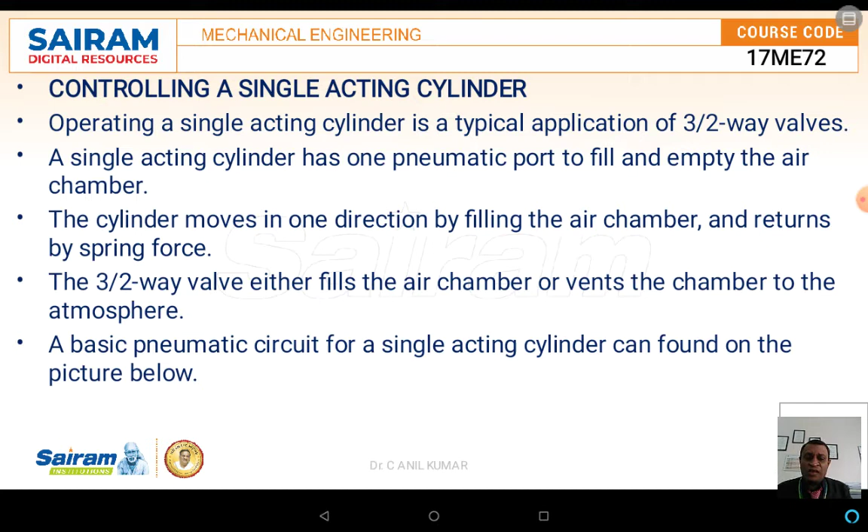mechanism. The basic pneumatic circuit of a single acting cylinder can be explained in a simpler way as this. Now here in this case, it consists of the ports. Even in these DCV valves, a 3x2 DCV valve is sufficient to control the entire mechanism with respect to the opening as well as the closing of the valve.

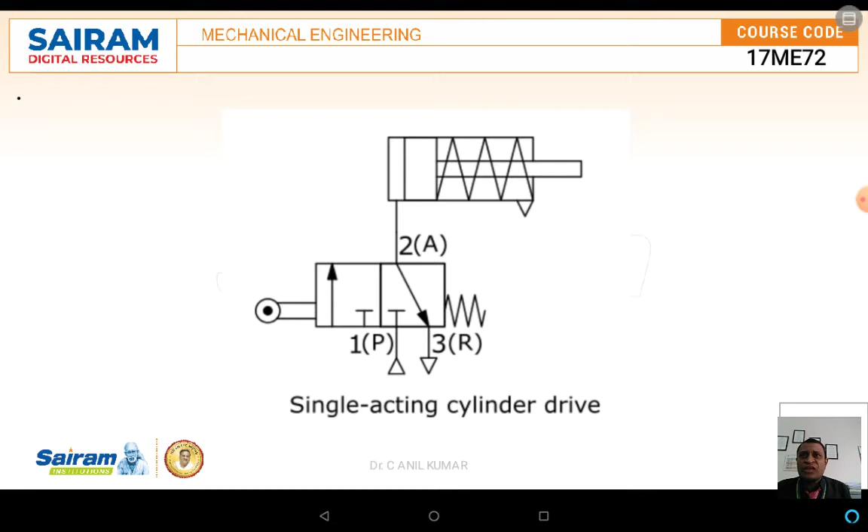The next part is with respect to the fluid power circuit using the electrical circuit. In the case of the fluid power control mechanism, along with the 3x2 valve, you can go for controller circuits. Controller circuits are also used to break and disconnect, or to continue the connection, and electrical switches can also be used to have a fruitful working of

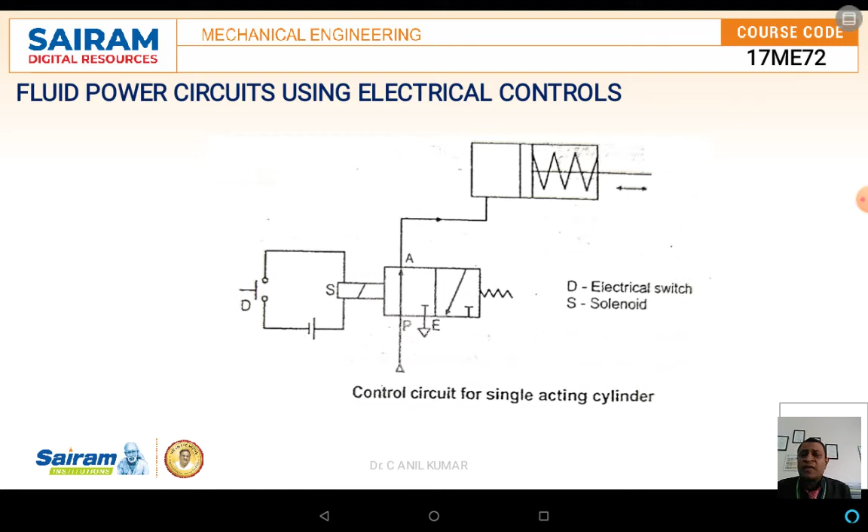a power circuit. Now the next topic we are discussing is the double acting controls with limit switches. Even in the previous classes, while discussing the cascade mechanism, we had discussed the limit switches. As here double acting cylinders are used with DCV valves, we have to use 5x2 way DCV valves, and then by using the limit switches, it is very easy

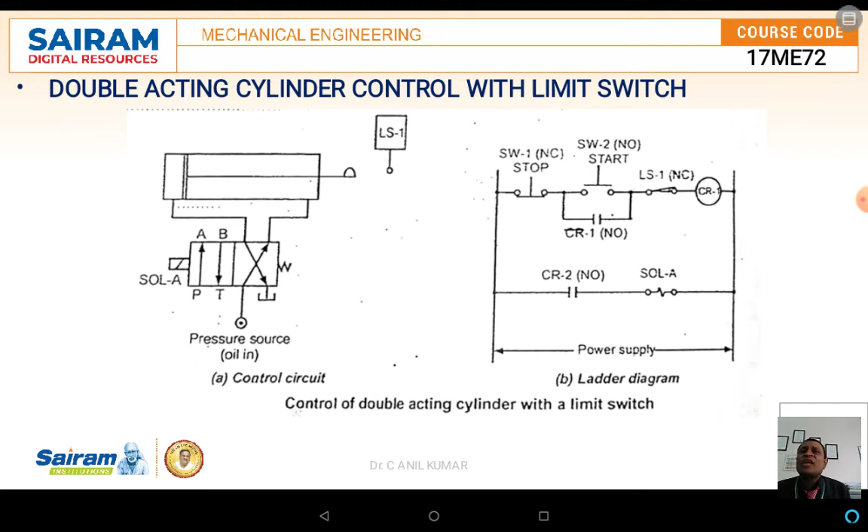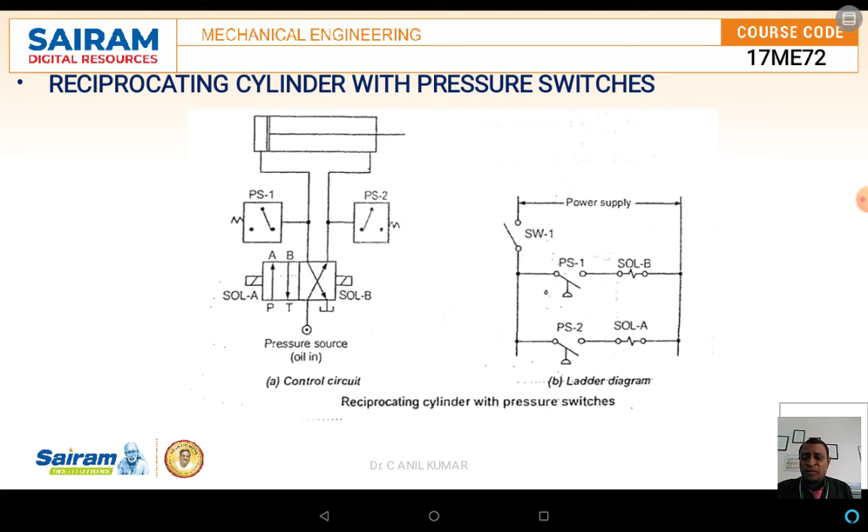to control. Now in the case of the reciprocating cylinders with pressure switches, the pressure switch is another form of control mechanism by which the entire cylinder movement can be controlled very easily. This is another switch which switches off and on with respect to the pressures. In the previous topics, we discussed using the valves. But as the technology has advanced, pressure control switches are also used to have the to and fro motion of the cylinder mechanism.

The next part is with respect to the memory function. The memory is a common basic function, and it can keep the component at a certain state permanently until there is a change of the signal. Especially this type of circuit plays a major role in the case of

the fluid power systems. In the memory function circuit, when a control valve is operated momentarily, that is, pressed for a short duration, the output signal of the 5x2 way direction control valve will be set on. It means that the signal will stay that way until the control valve is operated momentarily to generate another signal to replace it, causing it to stay permanently at off. This is called a memory function valve.

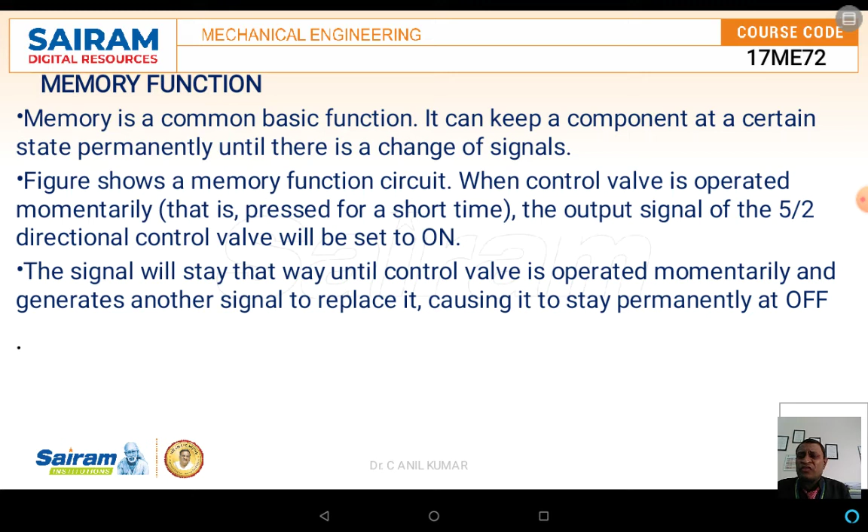A schematic diagram shows the memory function valve operating with respect to the forward stroke and the return stroke. Here the valves we are using are the 3x2 way valve and the 5x2 way valve. In the lower part, there will be two valves: one is a forward valve, the other a return valve, which are of the 3x2 way. The other one is a memory valve, which is a 5x2 way valve.

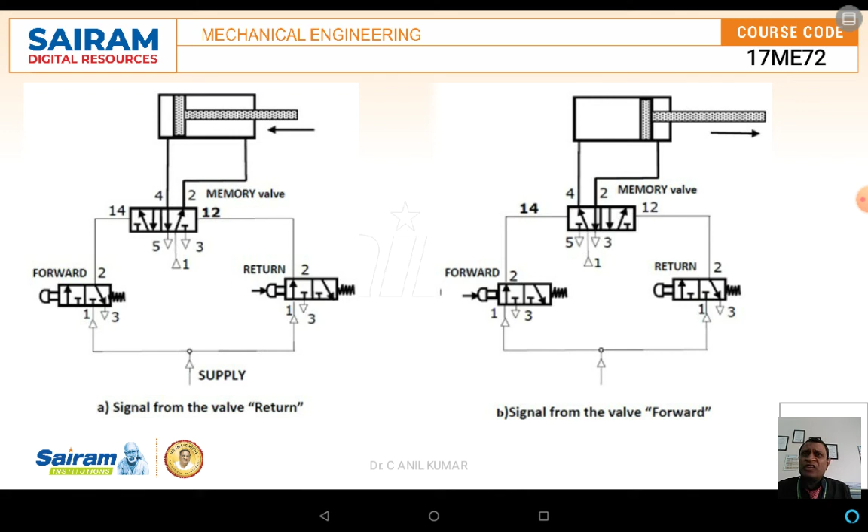By using these two, if you press the return push button, automatically the return stroke will be operated. Once the forward button is pressed, automatically the forward stroke will be operated. By pressing the 3/2 way valve, you can control the 5/2 way valve, through which the entire actuation of the cylinder can be controlled very easily. This is a small explanation of the memory function valve.